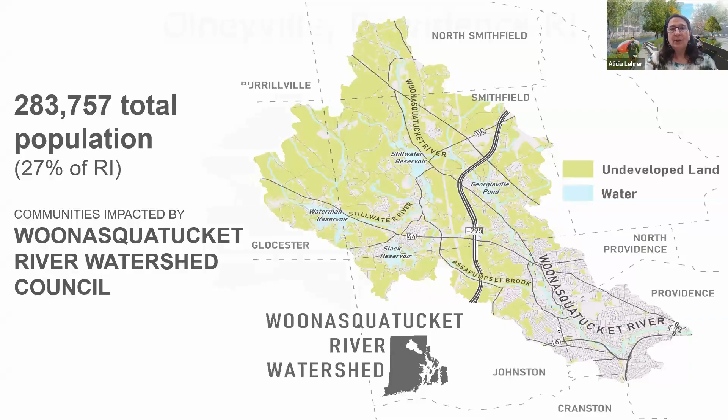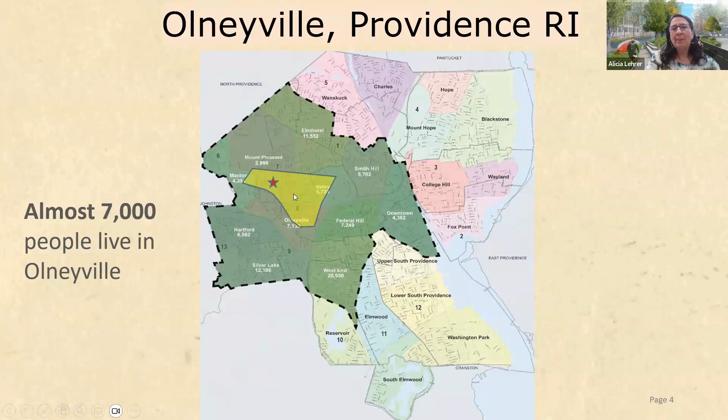And we have focused our community leadership and engagement programs in one community of Providence, and that is Olneyville. So this is just kind of the whole map of Providence. The green is all the parts of Providence that are within the Woonasquatucket watershed, and then that yellow triangle shape with the star is the Olneyville neighborhood. Just a little bit of background on Olneyville. It is mostly populated by Hispanic population, 42%. And then there's a mix of other populations, but because it's such a high percentage of Spanish speakers living in Olneyville, we actually run the programs either bilingually or exclusively in Spanish. And Maria Jose is a preferred Spanish speaker, so she is a great leader of the program.

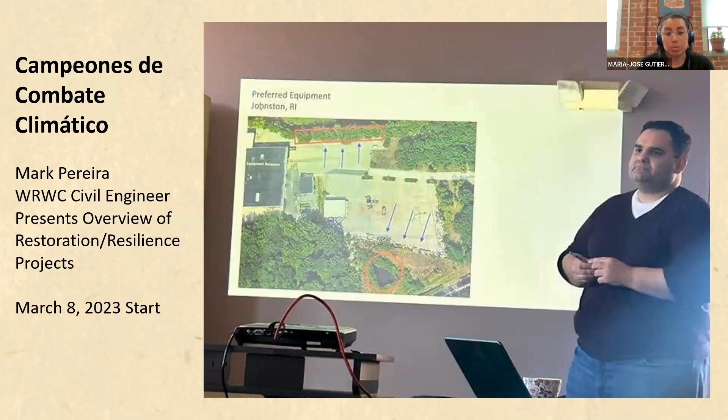Here we have Mark Pereira, who is the civil engineer that presents the overview of restoration and resilience projects, and who is giving us additional knowledge of the work that we're doing that sometimes maybe we don't understand right away, but with this deeper level of understanding and presentations, we can better comprehend the work that is being done so that we can better the system respective to rain, keeping the waters clean, mitigating flooding, and bettering the erosion areas.

Here in these images, we can see in greater detail what I was talking about earlier. We see in the larger photograph the corner where there is the majority of erosion because the current is strongest there in the San Souci Drive. And we can see the bike lane is being affected, and also other areas of parking and the United Way offices. And we're seeing the effects of erosion, which we can see on the right-hand side pictures. We can see the river causing erosion on the rocks.

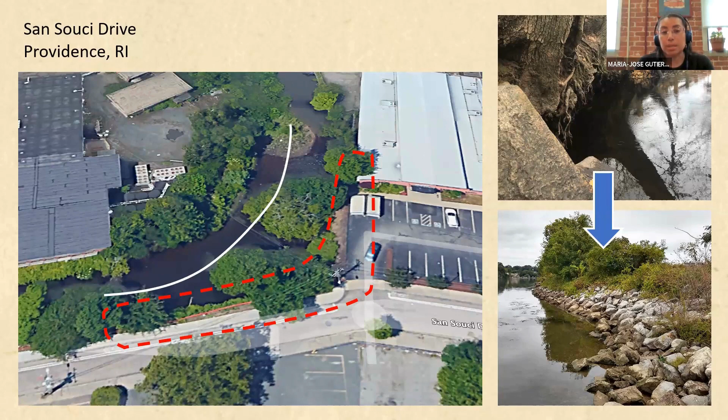In this image, we are making a visit to DeSoto Street. It is the champions here and one of the residents of the area, Gloria Morales, who has been a very important part of this project because given her experience and the consequences that she has already seen whilst living in this zone, she has been a great help for this project and for trying to find possible resolutions.

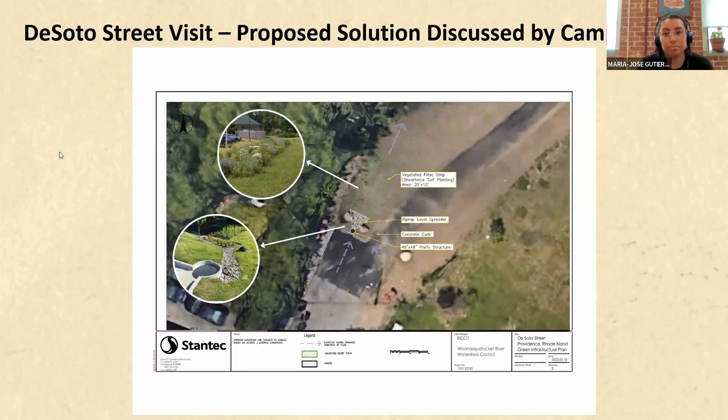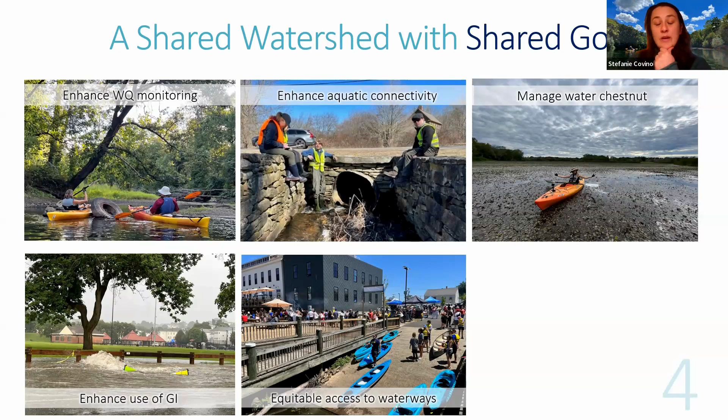Sometimes when those culverts, like you can see in that picture, are undersized and we have these large storm events, water can actually get in between the pipe and the roadway and cause the roadway to collapse. So it's important for public safety as well.

And a big project that we're working on in Rhode Island is to be able to restore migratory fish passage. So this river has 19 dams still on it. And as I said, it used to be a tidal river, and we had these migratory fish that would come into fresh water and go back to salt water. And they've been absent from this watershed for over 200 years. And we are working to make sure that those fish can come back to their original spawning grounds.

So in order to address all of these different concerns, and again, there are many more that I haven't mentioned, we've created the Blackstone Watershed Collaborative. We are hosted at Clark University in Worcester, but we work throughout the entire watershed from Worcester to Pawtucket, Rhode Island. And we're a group of over 120 organizations that all agree that ensuring a healthier and more resilient Blackstone River is critical by addressing our industrial past, ongoing urbanization, and the impacts of climate change.

We offer monthly meetings. Anyone is welcome, and we host a number of events that anyone is also welcome to.

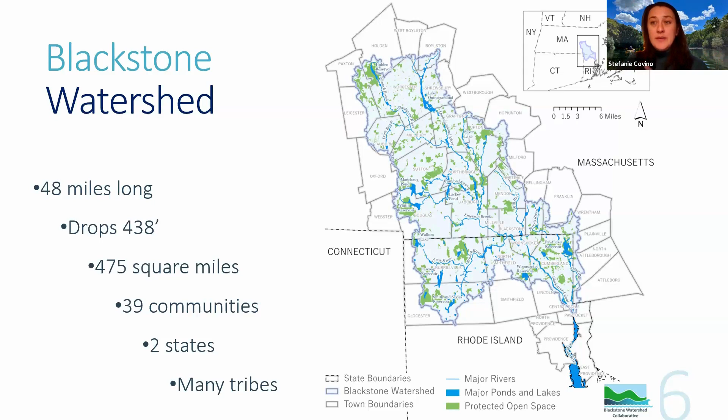So where is the Blackstone watershed after I've already said all of these different things? Like I said, we're a bi-state watershed in both Massachusetts and Rhode Island. It's about 48 miles long, and it's very important to note that it drops almost 450 feet over that distance. So in comparison, the Taunton watershed, our sister watershed coming into the Narragansett Bay, is a similar length, but only drops 40 feet. So we're very, very elevated, which led to our industrialization in the past. It's about 475 square miles altogether, encompassing 39 different municipalities and multiple tribes.

Blackstone has been called America's hardest working river because in the late 1700s, it was the site of the first industrial revolution, where we decided to use that elevation change in the river to dam the river and use that water to power a cotton spinning mill. And that became very popular, and we created many, many, many of these mills on the river. It's led to a lot of challenges. As I said, we still have 19 dams on the river.

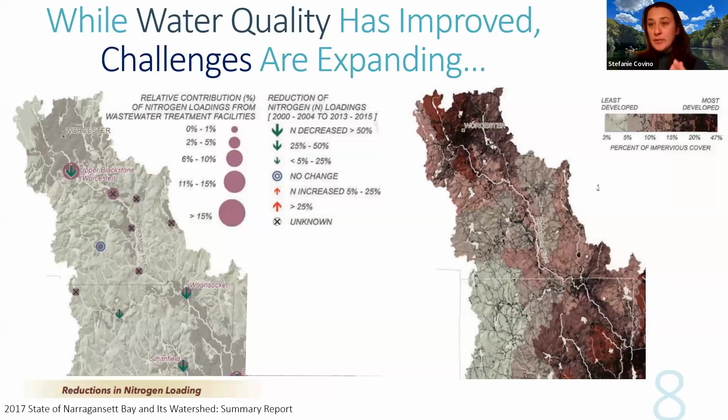And there's been massive water quality challenges. It used to be a place where no fish could live back in the 1970s. And that has improved a lot, especially addressing our point source pollution. So pollution from our wastewater treatment facilities, for instance, we've done a great job of addressing. We've put a lot of investment into that, but we still have a lot of high impervious cover areas that create a lot of runoff and contribute to water quality challenges, both in the northern part of our watershed near Worcester and also the southern part of our watershed in Central Falls, Pawtucket, and Woonsocket going into the bay.

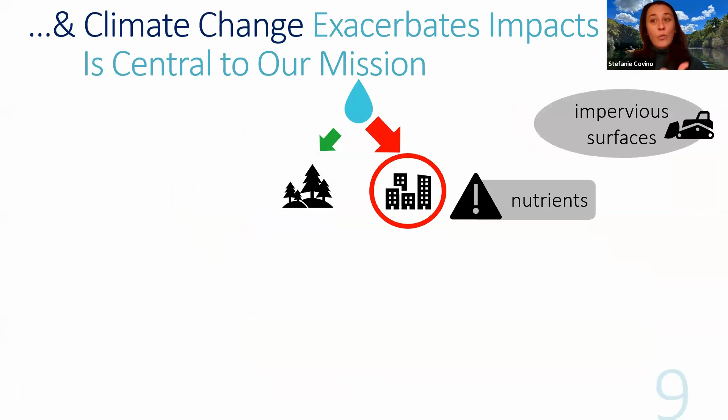So climate change is really important to everything that we're doing. And probably you guys know this as green infrastructure experts, but just to reiterate, when water lands in a forest, it gets soaked into the ground. When it goes into a city, we have to put it somewhere. And so we create all these impervious surfaces and put a grate on the side of the road, a catch basin. The water goes into that catch basin and is typically directed directly to the nearby water body, whether it's a pond, a lake, a stream, a river, etc.

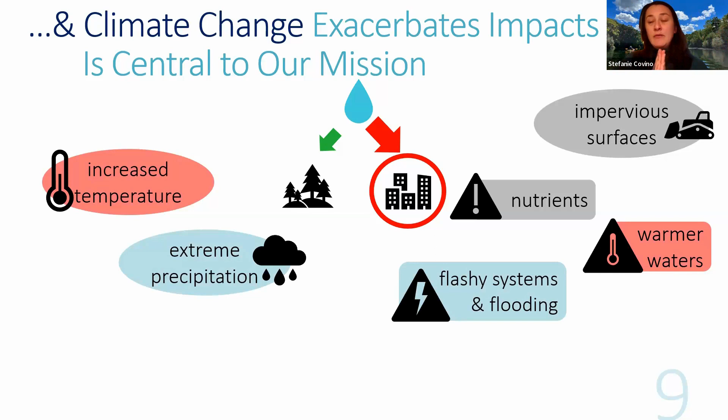And as climate change is affecting New England, we have these increased temperatures. Also, impervious surfaces mean a lot of reflection and increased temperature, so that's exacerbated. Again, we have this extreme precipitation, and by being able to have water run off of all of these impervious surfaces and directing it to a certain place where it normally would fall a little bit everywhere, we create these really flashy systems and a lot of flooding.

Also from climate change, another way that we experience that is increased drought. So this is leading to drinking water shortages, and we've already had some communities that have had private wells go dry. The city of Worcester had to tap into its emergency connection to another water source a few years ago when we had a severe drought. So these are things that we're already experiencing. It's not something in the future.

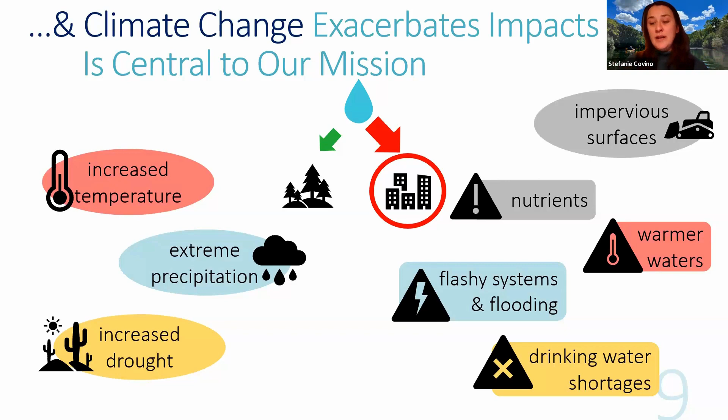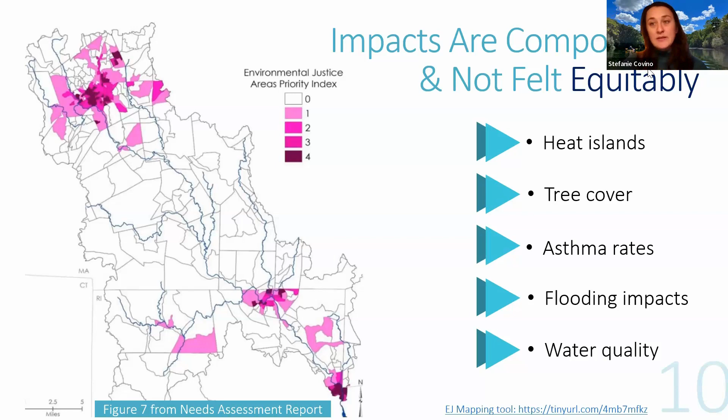We also know that these impacts are not felt equitably. So the same communities are being impacted by heat islands, areas where it's really hot, low tree cover, high asthma rates, flooding impacts, water quality impacts. And so a big part of the collaborative is being able to provide capacity building in the areas where it's needed most and provide technical assistance where it's needed most with an eye towards equity and justice.

So I'm just going to list several different examples of projects that we've had that were supported by this grant. So for instance, we've supported local planning efforts. Both the city of Worcester and the city of Woonsocket are going through comprehensive master planning processes right now. If you're interested in either, I'm happy to send you the link. They both have drafts that are online that you can comment on.

So we've shared public meetings, attended those, made sure that our priorities as a watershed, such as green infrastructure, nature-based solutions, making sure that local regulations support those nature-based solutions, are all included in the plan. We've shared information about those public meetings and been a part of that planning process, since often not everyone has the opportunity to attend all of those meetings. So making sure that all the different voices that we hear are represented in these planning documents.

Another project is about stormwater and combined sewer overflow. So I won't spend the time to totally explain combined sewer overflow, but it's when there's one pipe that manages both stormwater and sewer. And sometimes that overflows when we have these heavy rain events and puts sewage into our communities. And often that happens in some of our highest environmental justice communities, those who have the least ability in order to maybe know what's going on or hear about notifications, making sure that they're always provided in different languages, and what that really means for public health and how to avoid these issues, avoid that water when it's contaminated.

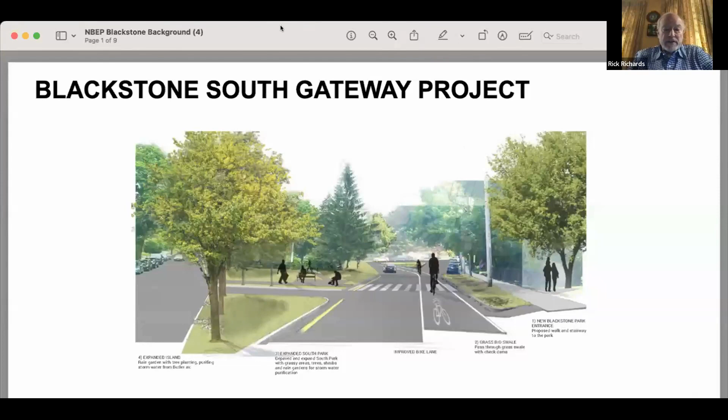Okay, good morning. I'm Rick Richards, and I'm with this project. It's called the South Gateway Project. It is a great example of trying to tame a flashy system. It's the recipient of a lot of water that comes down the hill and creates lots of concern for the residents and erosion concern. I'm here to begin this by telling you who is part of this enterprise. And we have a bunch of logos at the bottom.

To the left is the logo of the Searle Group, and that is represented by Colgate Searle, who is a professor emeritus in landscape architecture at the Rhode Island School of Design. Then we have the Horsley Witten Group, and that involves John Ford, who is a new urbanist, civil engineer, and urban designer. Then we have the Blackstone Parks Conservancy with Carrie Drake, who is the president of that organization. They're stewards of the Blackstone Boulevard and Blackstone Park, which is really pretty central to the area of this project.

Then there's the Seekonk River Alliance, and I am the organizer of that alliance. And the concern of that is the stormwater doesn't just come down into this area. It comes out of a watershed, about 450 plus acre watershed. And so that's outside the remit of Blackstone Park. So we had to create another organization to address that. And that other organization, the Seekonk River Alliance, also addresses the watershed of the Seekonk River, its shoreline and uplands in the tri-municipal area.

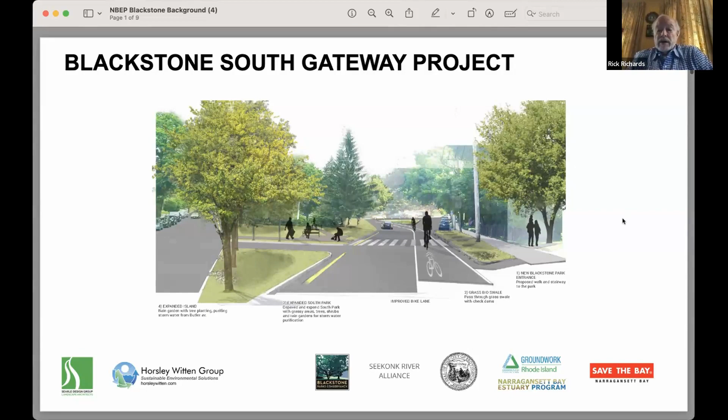We are also working with Groundwork Rhode Island, the Narragansett Bay Estuary program. Thank you very much for your money. And Save the Bay. So that's who's working on this, and I'd like to turn it over at this point to let Colgate talk about the context of the project and more about the detail of the project itself. Colgate?

Unmute, Colgate. Colgate, you got to unmute. I'm all set now.

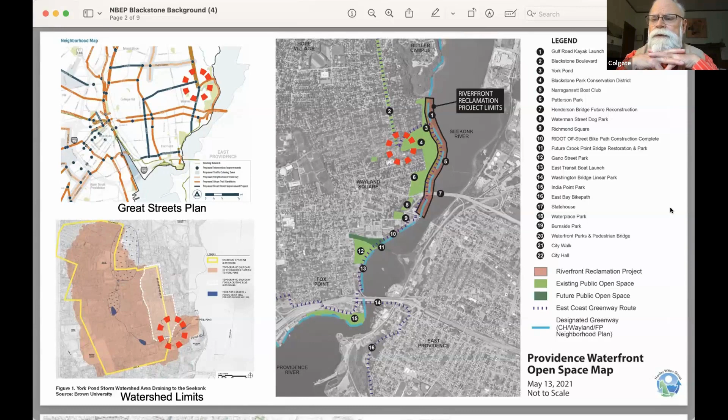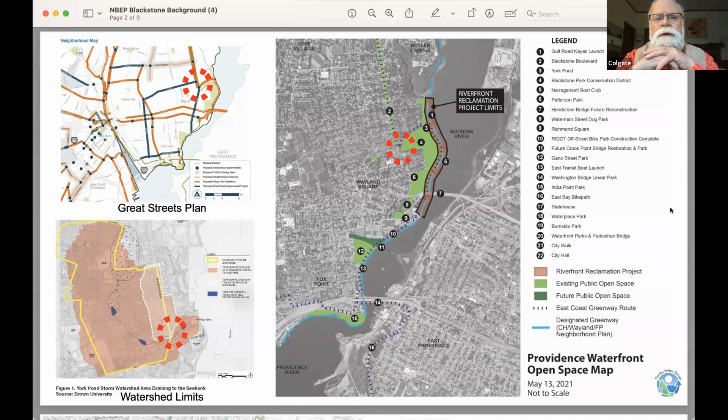This project started a long time ago, and it started with a concern for the Seekonk River and the edge and the public access and taking care of the edge. It started with a planning study that was done about 10 years ago through public participation, and it looked at the entire edge in Providence, and put forth a series of proposals. It got planning involved. It got a lot of people involved. The red circle on the two drawings on the other side is the study area for the Gateway project that we're presenting this time. If I could have the next slide.

In all the work on the Seekonk, especially with water quality and some of the flows and things, it became clear that the watershed was the solution, right? We have to slow water in the watershed. We have to treat water, get the sediment out, get the pollutants out. So this is a map of the watershed. The dotted red line is the watershed. And thanks to the Department of Public Works in Providence, they just remapped all of their storm drainage, their sewers and their combined sewers, and where the grates are. So it's a huge resource.

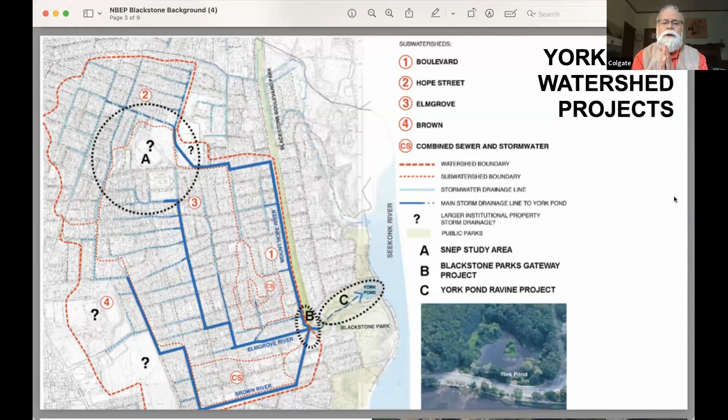And then C is the ravine, which is under great stress now and deteriorating. The channel is deteriorating. What are the options? We're hoping to get funding to do a preliminary study of, can it be put into more of a floodplain stream? Should the estuary be restored and we allow the salt water to come in? Those types of questions. So we've moved from looking at the edge to looking at the watershed and combining that work. And our next slide.

So with the Gateway project, we're looking at the slowing and filtering of stormwater. We're looking at improving safety, for the bike, the pedestrian, and the car. And we're looking at really beginning the Boulevard Park. It's also the potential of a connection between the two parks because they actually join here at this site. Next slide.

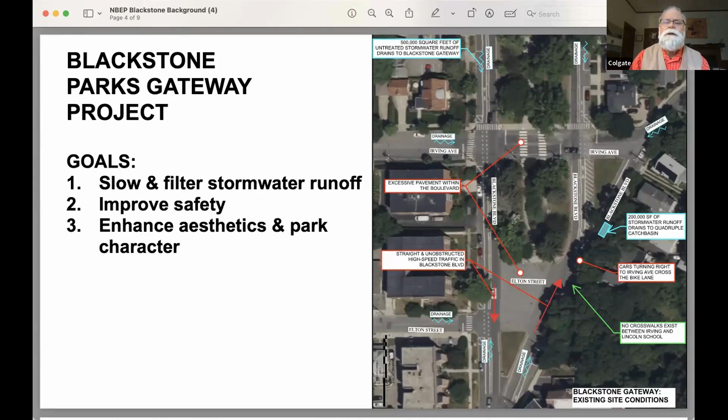This is a vision, and it was worked on by my office with help from John Ford from Horsley Witten and people from Public Works. So this is the site now. This is where you accelerate and get your ticket. It's a big piece of asphalt paving. It's incredibly difficult to cross the street, and the one street crossing you get is not visible for the car. So this is the site at the beginning of the boulevard. Next slide.

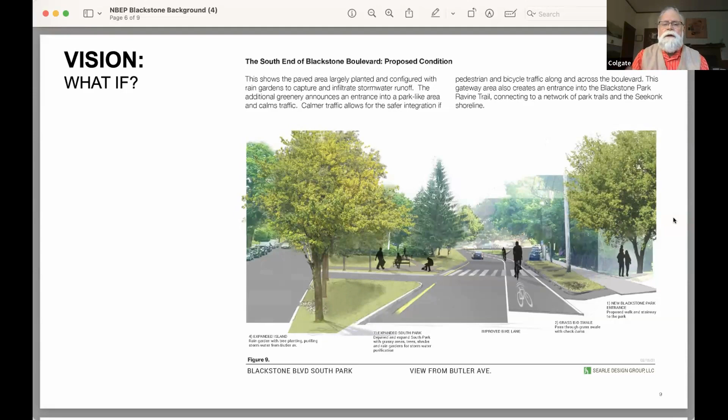This is the vision where we could remove most of that paving. We can provide swales on the right side of this picture. We can provide additional land for the capture and holding of stormwater and letting it percolate. We can also allow a much more ceremonial beginning in terms of park improvement, but also with the pedestrian and the bike considered.

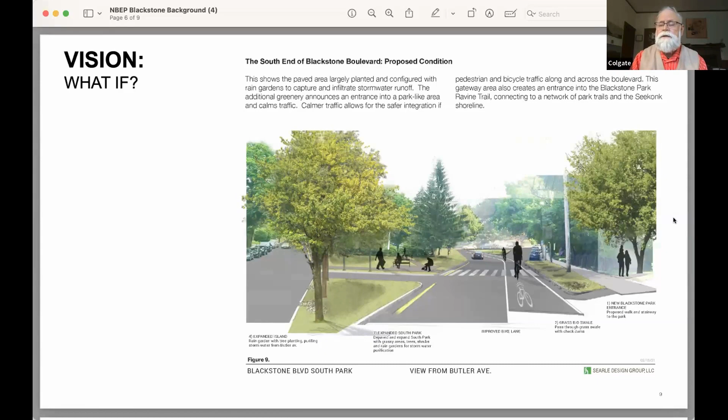So this is the kind of vision, and this work was all done over the last 5 or 6 years, and allowed us then to present a very clear idea in order to get funding to go actually into design. Next slide.

And take it away. I'm out. Okay, Tim. Yep. Hi, everyone.

I'm Tim Shea. I work in the Providence Planning Department. As Colgate mentioned, for this project I've been kind of a liaison between the city, the parks, public works, planning actors, and the project team. But my focus has really been on how we engage neighbors and community members in this area in this design process. It was a really important part of our proposal and the contract that we have on this project.

But the form that this took was really a collaborative one, where as our team was looking at alternatives of different designs that could potentially do all those great things that Colgate spoke to, capturing stormwater, slowing it down, improving pedestrian safety, enhancing the park itself, we were bringing in community members in that process. So we've done a number of things.

We've met really in depth with the immediate neighbors of this area, the people who will see these changes day to day. We held some meetings on site with those neighbors. We've held meetings at people's homes, and they invite the folks around. But we also held kind of a more open public event, an open house, which you can see in the top 2 pictures on the left there at Temple Bethel, which is just around the corner.

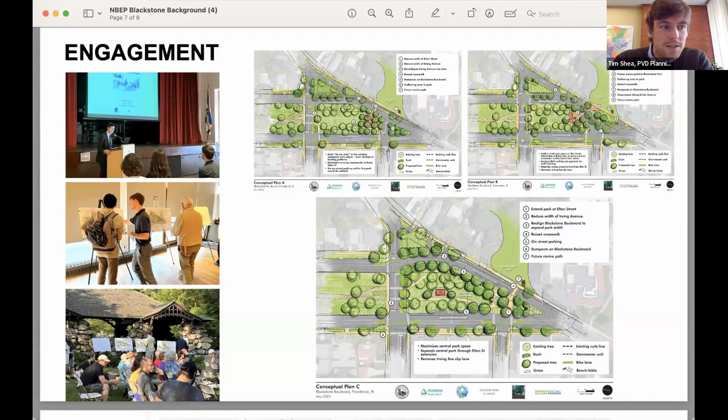What we found through all of these various forms of engagement was that there was almost universal support for the alternative that really maximized the park space and the depaving of this area. People really liked the idea of having a little hub that is a gateway to the rest of the system, that could be seen as maybe a mini Lippitt Park in some forms, but that also addressed the slip lane to the north onto Irving Ave, that really tried to narrow lanes of travel to slow traffic and make it safer to be crossing the street or on a bike.

And of course, wherever we're expanding green space and getting rid of pavement, the further design will incorporate a lot of specific green infrastructure options within these areas. So we've come a long way, and I think a lot of the neighbors really feel a part of this, really feel like they've been driving this decision-making process. And we're pretty excited about where we are today, which is what you see in front of you. So I'm going to pass on to Carrie now.

Hi, everybody. I'm Carrie Drake. I'm the president of the Blackstone Parks Conservancy, and I am just going to run through what our next steps are now that we have this strong draft. The next step is to have 2 more meetings, one with immediate neighbors and one that really tries to engage passersby, a larger meeting on site, hopefully. And then we'll develop a 75% design draft with engineered drawings. From that, we hope to move to a shovel-ready design.

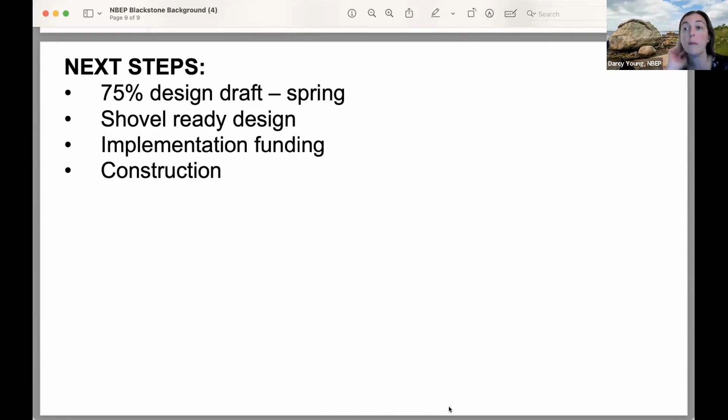But for the Blackstone Conservancy, I was impressed with the amount of outreach that you did in this neighborhood and the broader neighborhoods to get feedback and buy-in on this. What would be some of the lessons learned during this planning process that you would want to share with folks who are going to start working on these designs?

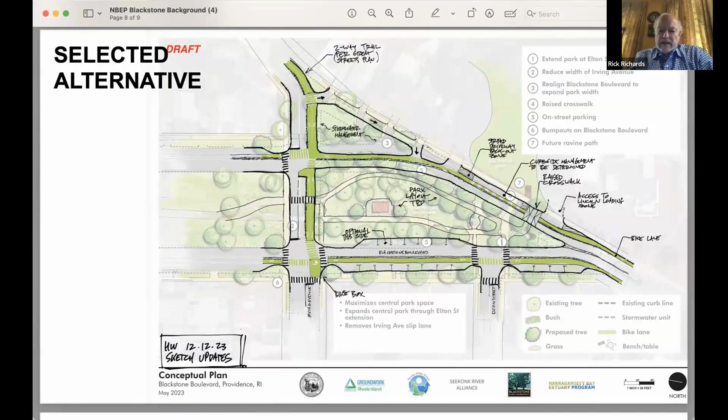Let me make just 2 observations, and then people can chime in. First of all, and I think that's a lesson we learned in the process, the payoffs are pretty powerful. People began to endorse and even own the ideas of the project. And second of all, it takes time. It's not necessarily difficult, but there's a lot of arranging that goes into each event, and you need to be well prepared to engage with people. It really does not pay off if you're not prepared. So you cannot be haphazard in this process. Those are my two observations.

One thing that I would add to what Rick has said there is, I think I really appreciated, and I think community members appreciated that, you know, we did the kind of education about the benefits. Everyone really seems pretty on the same page, but our engagement really brought them into the design process and said, here are these alternatives that we're looking at. You know, we're curious based on your lived experience of this area, which of these alternatives do you see working? Do you not see working?

So I think really we kind of defined the boundaries of what was possible and then brought people in to really be decision makers there. And I think that's pretty empowering. And I like to think that folks have really agreed with us there.

I think one thing that impressed me was the importance of something as old school as a yard sign, because the Blackstone Boulevard has a lot of foot traffic. And so one way to engage people that we didn't know was just to put a couple yard signs there, and people passing by would see, and there was a QR code where they could then go to the website and weigh in on the designs and learn about it. But I was impressed by the power of something so simple.

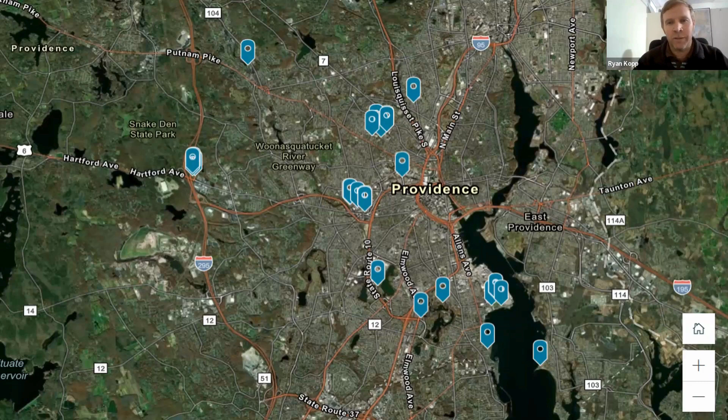So we would monitor these sites until we received 3 qualifying rain events. And we set that metric of being 3/4 of an inch of rain. That's when we thought we had enough information to assess whether or not these sites were working properly. Once we got those 3 qualifying rain events, we then rotated the equipment to 3 more sites. So it was fairly time consuming.

So we installed some sensors within the pre-treatment area and the treatment area at the low point of these basins. These sensors measure water level or water depth. And so that way we can get a sense of what's going on when there is water at the site without having to be there.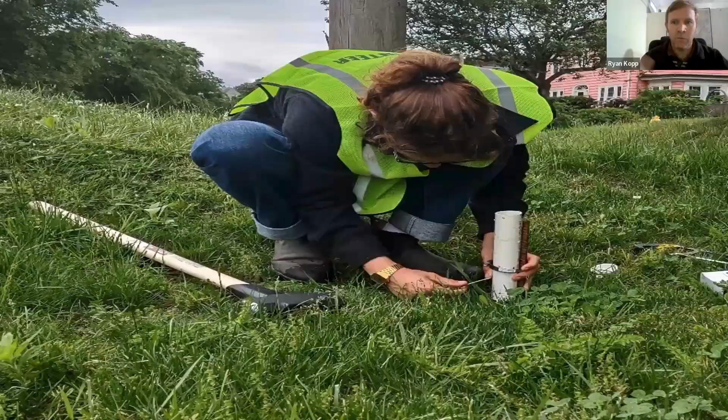So how we did that, we set up these above ground stilling wells. They're inexpensive. It's a piece of PVC pipe, hose clamped to a piece of rebar, drilled some holes in it so that when water does fill up, it goes inside that PVC pipe. And then we drop these sensors in here that measure the water level. And then you can program this instrumentation to log water depth every 5 minutes, or whatever you want. We chose 5 minutes.

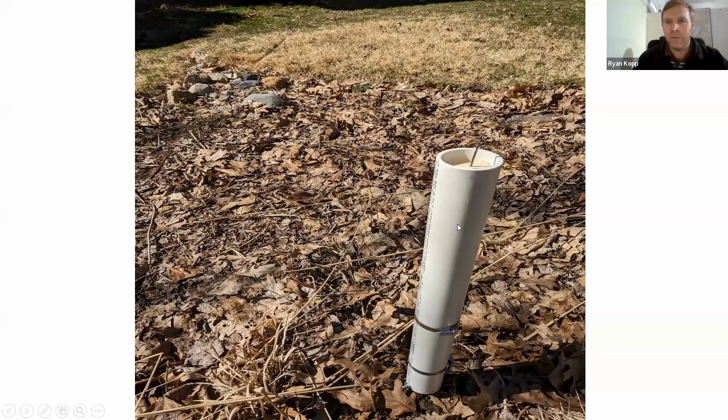We filled that mesh basket with that granulated cork so that when water entered into that stilling well, it rose up, and then once that water level receded, it leaves a nice debris line on that stick with that cork. And so essentially then you have a water depth, and this setup only costs a few dollars, and so you don't have to buy this specialized equipment.

We used it as a way to verify that the instrumentation was recording a similar depth, but you could use it standalone as well, and then you are able to get a maximum instantaneous depth of any rainstorm that you have installed this crest stage gauge in.

We then surveyed each site, did an elevation survey, and that was just to reference the elevation of the sensor location with other design features, particularly the overflow bypass elevation, the weir elevation, or the top of a berm, just so that all those elevations are correlated and referenced together.

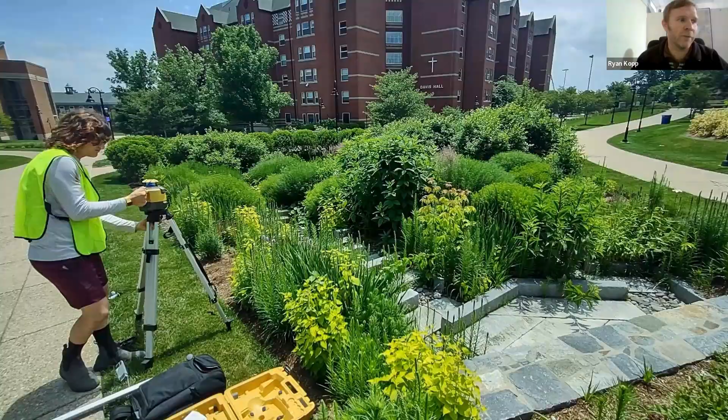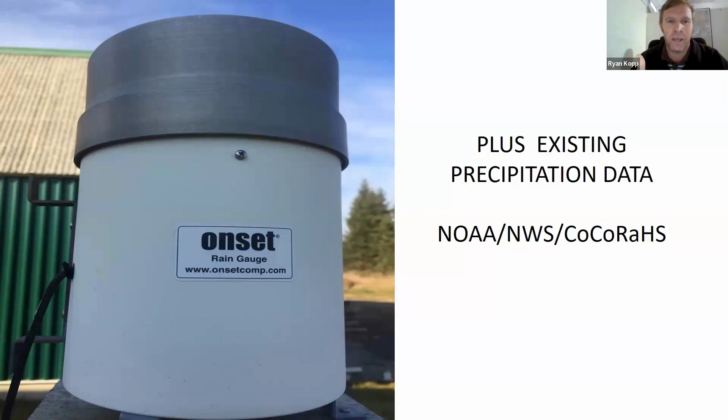We also measured rainfall. In order to understand how much water should be in a site, you want to get a sense of how much water is coming down from the sky. So we set up our own rain gauge, and then we also gathered existing rainfall data from NOAA, the National Weather Service, CoCoRaHS, and then when we were comparing that versus site water levels, we tried to use the rain data that was closest to that site that we were comparing the rainfall with.

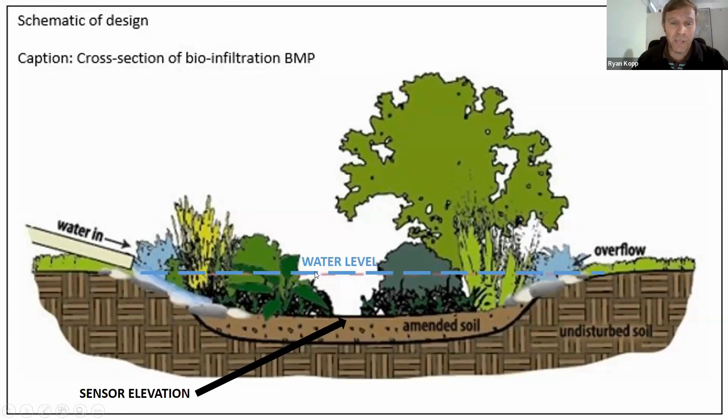So this is just sort of a cross-section to visualize what we're trying to understand. And so here's the location and elevation of the sensor. When water comes in, because of what we were recording, we had a water level. And then because of our elevation surveys, we also had the elevation of an overflow or a berm, basically trying to understand what the overall storage capacity is of this site. And during a given rain event, if we're not getting close to that designed storage capacity, that was an indicator that there probably could be a problem with the site.

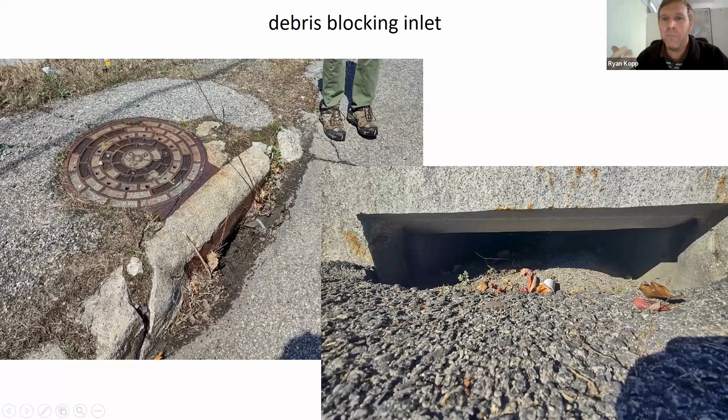Another common issue is debris blocking the inlet that deters stormwater flows from entering the site. Sometimes this is just a maintenance issue, that there was a lack of maintenance, so it wasn't being done. Other times it's maybe a combination of a design that makes it not real practical or easy to access that debris to do the maintenance. So that's an example of it can be just maintenance, but it could make it a lot easier for the maintenance staff if the design was improved.

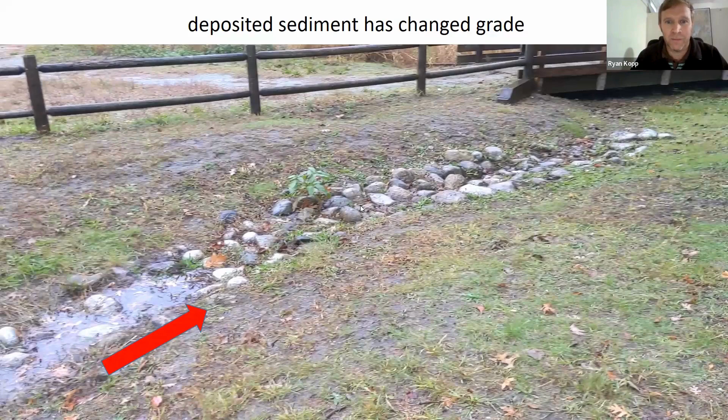This is an example of a forebay. The forebay is the pretreatment area is designed to deposit sediment, but if you don't remove that sediment from the forebay, it does end up eventually changing the grade of the unit itself. And so you can see the water here wants to go this way, but there's a big mound of sediment and debris right here. So water can no longer flow that way because the grade has been changed.

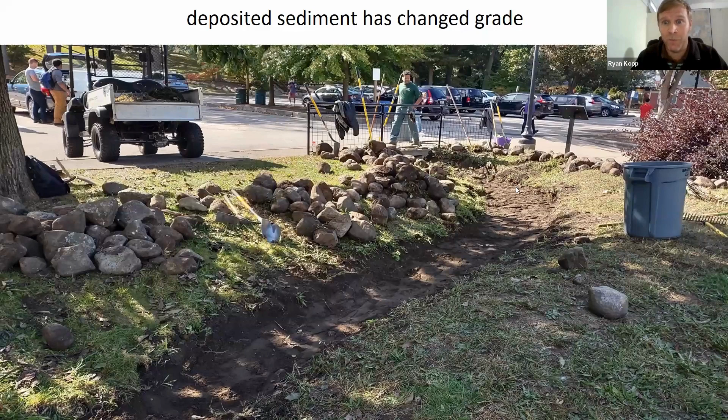This is that same site again, where an attempt was made to take all that rock out and regrade it. This took about 4 hours with 15 people, so it's not something that is sustainable long-term for, I think, any maintenance staff. And we got it working again, but then within 2 or 3 storms, the same thing had happened, and the sediment was deposited in the pretreatment area, and so the site was no longer working again.

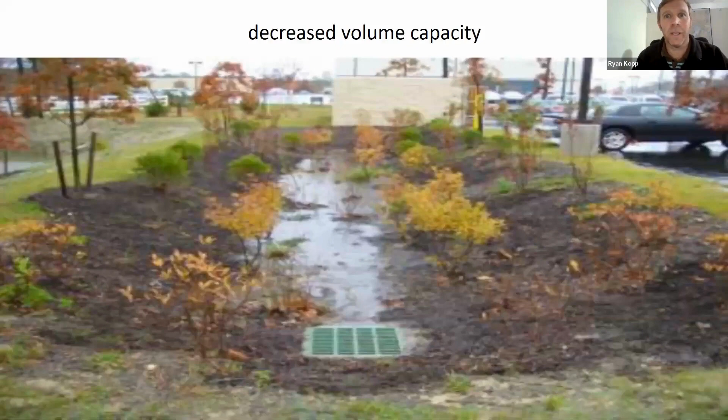Another issue with sediment in your site is not just in the pretreatment area, but in the treatment area. If you get enough sediment deposited in the treatment area, you're decreasing the volume of water that can be treated. So here you can see the overflow down at the bottom. Really, this site has enough storage capacity that you could raise up this overflow, and then you would have more capacity to treat stormwater. But I think that's a common issue that's going to continue to occur as these sites age and continue to get sediment deposited over and over again.

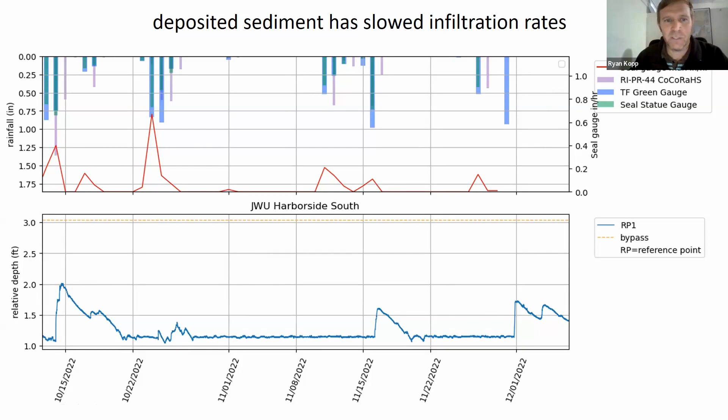This is an example of a site that, because sediment has been deposited, it is decreasing the volume that can be treated, but it also is infiltrating and draining real slowly. You can see right here, during these big rain events, the water level comes up. That's good. Water's getting into the site, but it should be coming down again and draining real quickly. But instead, this is taking almost up to a week, sometimes 4 days, when it should be draining within 24 to 48 hours. This brings on complications with mosquitoes and things like that.

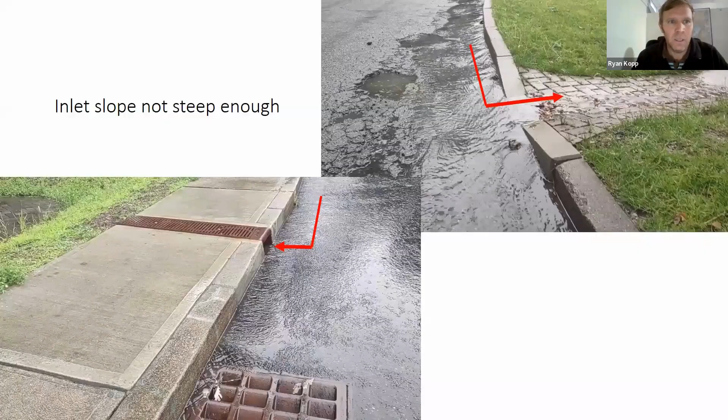The slope of the inlet is also something that we saw frequently. Here, water is coming towards us up in the upper right, and the inlet is here, and it's supposed to be going down, off to its left if you're traveling like the stormwater, but it's just heading right towards us because there's no change in gradient or slope to have gravity coax and push that stormwater into the site. It's pretty common that we see it with these curb cut inlets.

Here, the same thing's happening with a trench drain inlet. The water's coming towards us. It's supposed to be going in here, but because there's no change in slope within the asphalt to push it into the inlet, it just ends up bypassing the site.

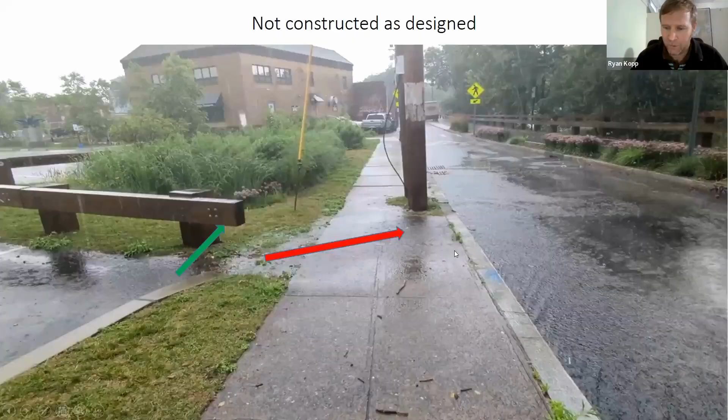This is a rain garden that has multiple inlets. On this other side over here, the site's working really well. Water is getting diverted from a large parking lot off to your left. Water's entering the site, but over here, this part of the parking lot is draining right here, and it's jumping over the sidewalk into the curb and down into this storm drain down here. That's not where it's supposed to be going.

I spoke with the designer, and he said this site was designed to have, instead of a transition curb, a full curb here that would divert water into this site, into kind of the backside of this site. But because this curb got constructed incorrectly, the site isn't working fully the way it should be. And I think that's the case in many situations, that it is functioning, but maybe not 100% the way everybody wanted it to work.

Sometimes the issues, we don't really know what's going on. This was a site where there's a catch basin out on the road, and water is being piped from the road into this large infiltration basin in a DOT on-ramp. And even during this rain event, where there was 6 inches of rain, 8 inches of rain, you probably remember that rainfall in 2022, it was just massive. Our water level sensors were not picking up any ponded water whatsoever in this basin.

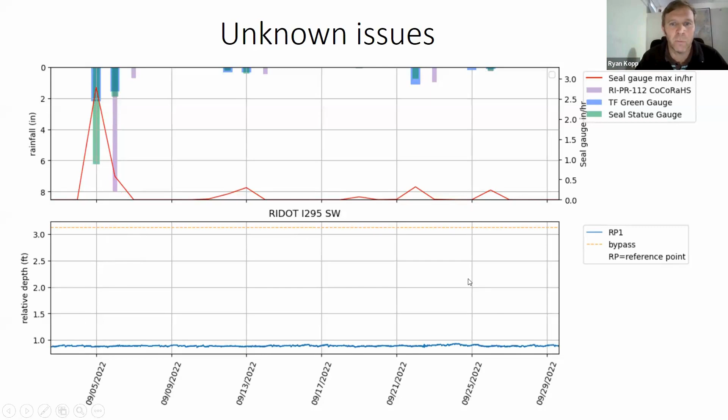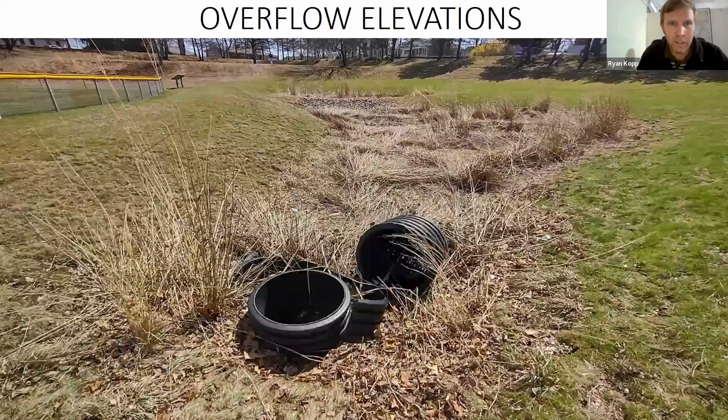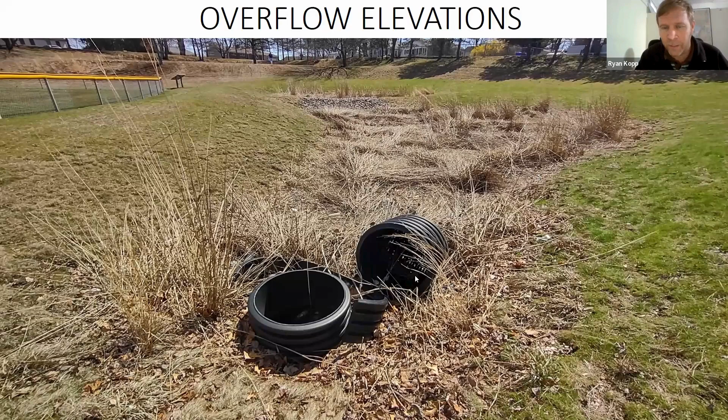Overflow elevations are another common issue. This site, these black things aren't tires. I think it's a riser to control the elevation of the overflow. Right now, the elevation is quite a bit lower because these risers were either vandalized or broken in a storm or something and not put back on. So this site is working, it's filling up, but it's not filling up to the design storage capacity. It's filling up just a little bit and then going down that overflow.

We've seen the opposite of that happen too, where the overflow elevation is actually higher than the elevation of, say, a berm like this. And so water is then escaping out the side of the site rather than going down that emergency bypass. And it can cause all sorts of flooding; if it was this site, it would cause flooding in this ball field or something rather than acting like an emergency bypass.

That's sort of many of the examples that I have. I guess the take-home message would be to continue to monitor and inspect green infrastructure after implementation. Sometimes immediately after a site is installed, there are problems with it. Sometimes 5 years later, there's going to be an issue with it. They have a life expectancy, whatever that life expectancy is, and you're going to have to probably continue to make repairs on the site to keep it functioning.